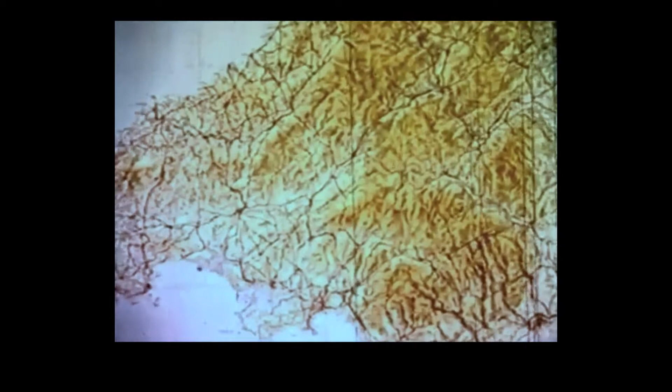Increasing industrial demand in the supply area of the West Glamorgan Water Board has created problems in times of drought. The board's consulting engineers have recommended that the Towy and its catchment area can solve these problems for many years to come. What is needed is a reservoir up in the mountains near the source of the river, where the rainfall is heaviest, 2,000 millimeters a year.

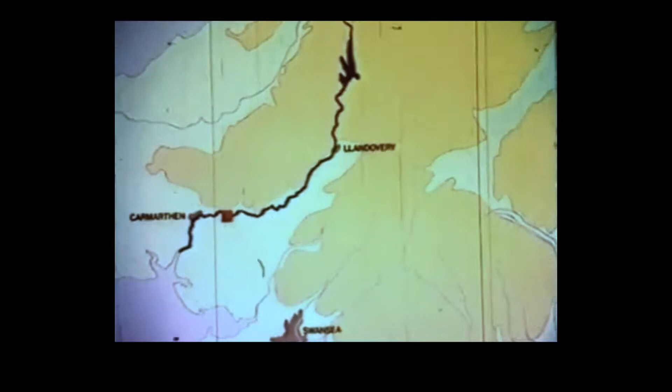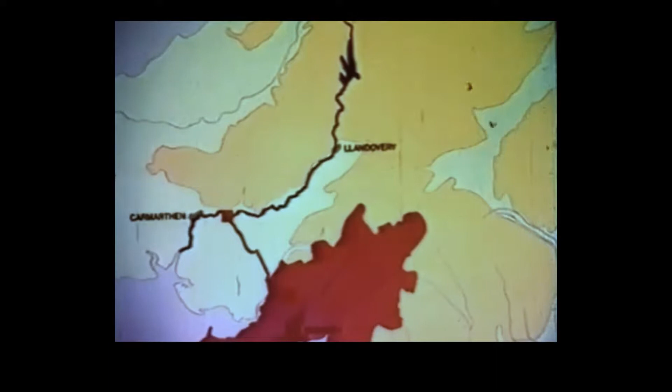The new lake will then regulate and augment the flow of the Towy. Water will be taken from the river 64 kilometers downstream and pumped to a new treatment plant and control centre near Swansea. From there, it can be distributed through the board's existing supply system. The biggest job in the scheme will be the construction of the dam at Llyn Brianne.

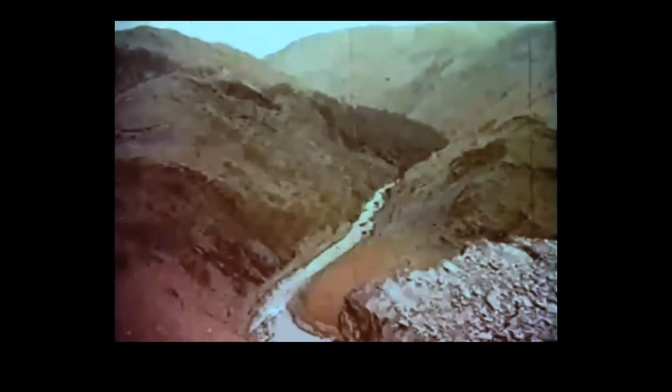The site is in a narrow gorge. The rock is exposed or near the surface. Studies by the consultants have shown that a rock-filled dam with a clay core will be less costly to build than one of concrete. 4.5 years have been allowed for its completion, but the contractors are aiming to impound the river after only 3.5 years.

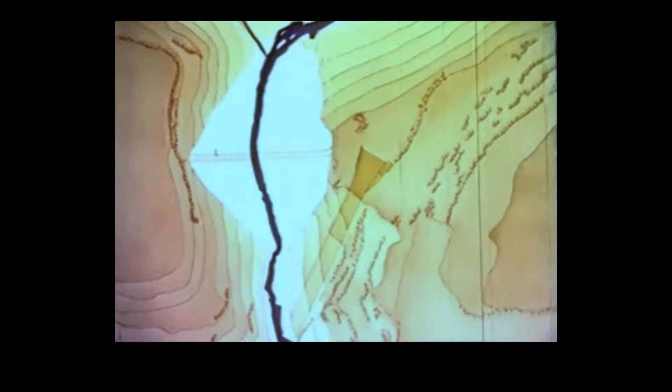Standing over 90 meters, Brianne Dam will be Britain's highest, and the length along its crest will be 300 meters. 5.5 million tons of material have to be placed in this gorge. While this is being done, the Towy will have to be diverted through a tunnel some 430 meters long. A coffer dam will be needed to divert the river into the tunnel and to keep the gorge dry.

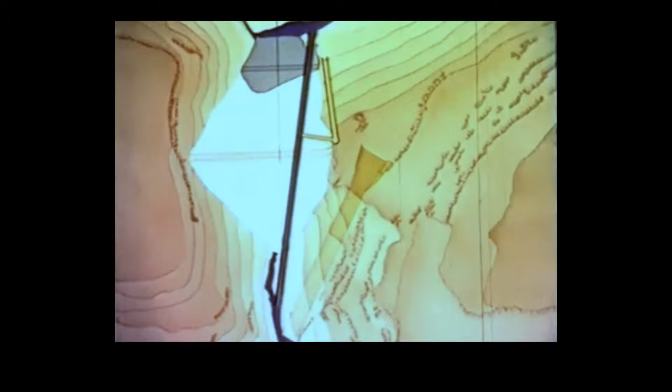Other underground works will be needed in the project, principally a draw-off tunnel and shaft to lead water from the reservoir to the permanent outlet works at the downstream end of the tunnel. There will be an overflow spillway, as well as new roads and bridges to the regulator house and across the dam crest. A quarry area at the spillway approach will provide the rock fill for the dam.

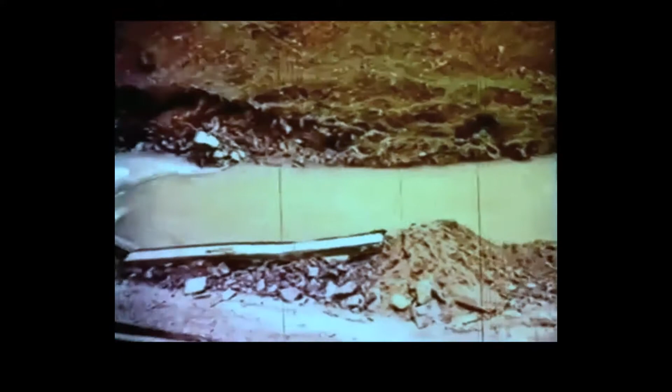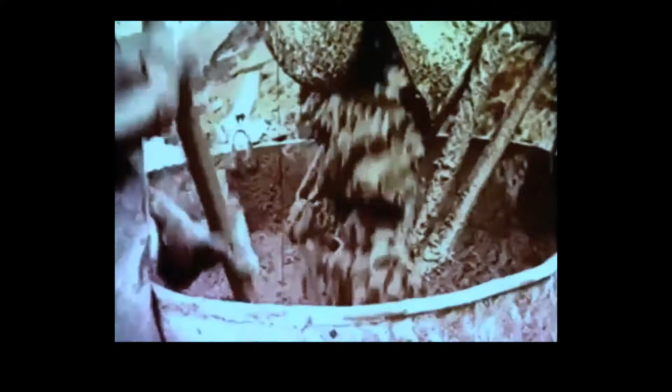First, the Towy must be diverted. The downstream end of the tunnel has to be extended in cut and cover to carry the river well clear of the toe of the dam. The tunnel is lined with concrete. All major tunnelling work must take place during the first year on the site, the year of preparation. And already, Llyn Brianne is living up to its reputation for high rainfall. The tunnel is ready to take the Towy.

Upstream, the material removed forms the first part of the coffer dam. And all the time, the river must be kept free of pollution and available to the users downstream.

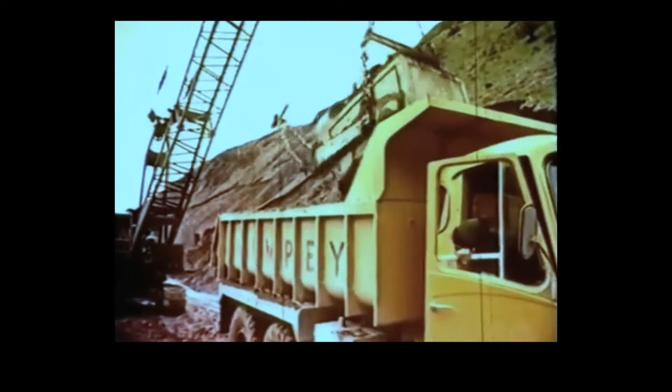Work has been going on for 12 months. Already 300,000 cubic meters of loose material have been removed from the river valley. But not until the riverbed is dry can the cleanup and grouting be finished. The next 2 years of the schedule will be the years of building the dam itself.

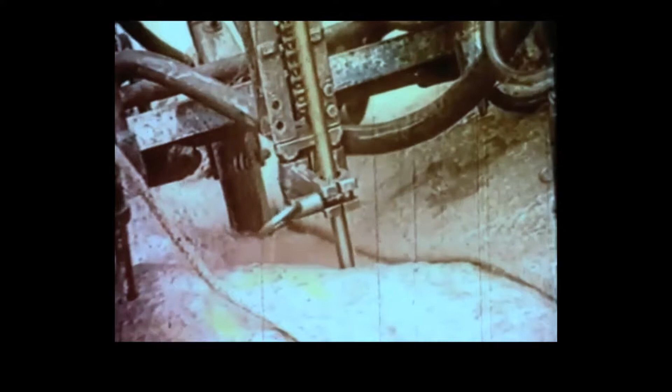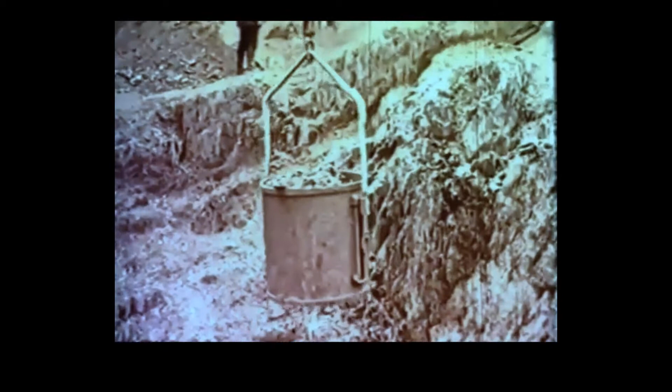The rock is largely a slaty mudstone. Foundation work has uncovered a channel cut by Ice Age water. This must be cleaned out and filled with concrete. On the steep valley sides, the abutments have to be cleared of loose rock, while the area which will be in contact with the clay core has to be excavated down to solid rock and then sprayed with concrete.

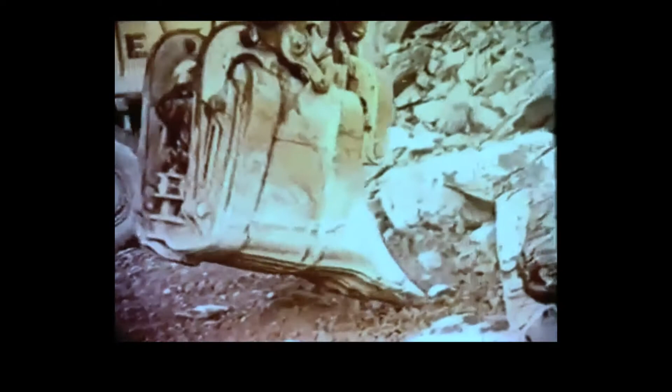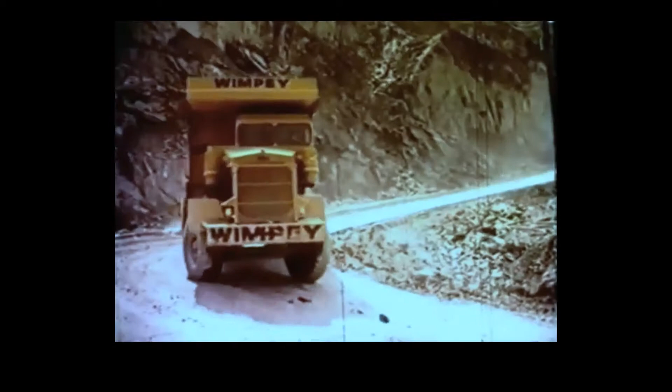Rock will form the bulk of the dam, 4.5 million tons of it. All to be won from the quarry area, up to 16 tons at a bite. The rock is hauled to the dam by a fleet of rear dump trucks, each with a 45-ton payload, running day and night over a system of temporary roads designed to serve each level of the dam as it rises above the valley floor.

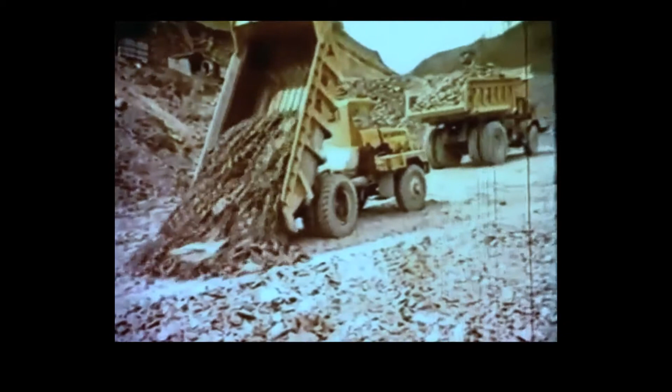Only 11 kilometers away, near Abergwesyn, is the source of clay for the dam. Its availability was a key factor in deciding the kind of dam which would be built. The clay will form the dam's impervious core. Once sheep drovers passed this way, taking their flocks to the markets of London. Now the roads are new, and so is the flock: 25 tipper trucks carrying a regular supply of clay for the dam builders.

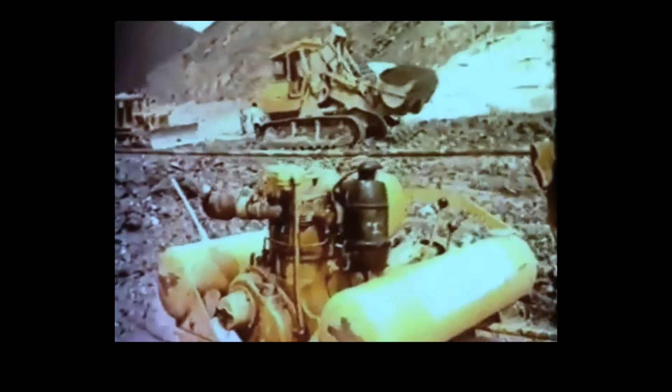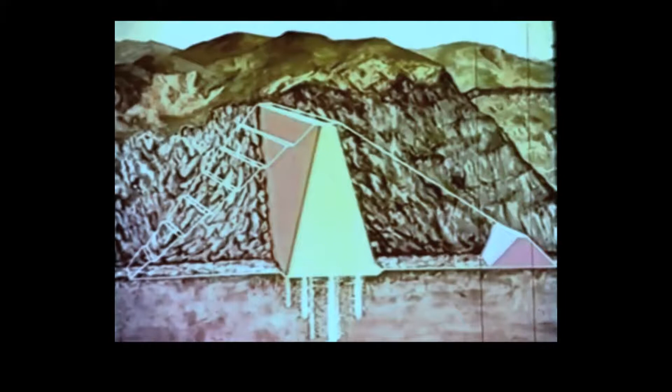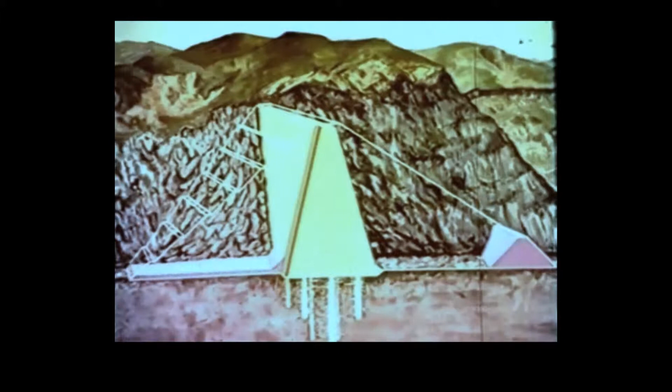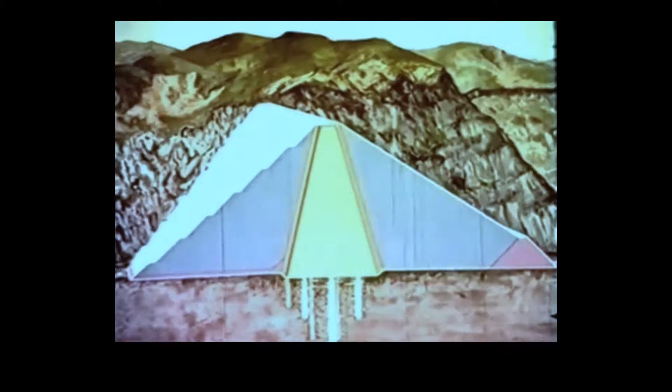It is protected from erosion downstream by a filter zone of fine material. Beyond this is transition material of clean rock, while there is a drain of larger rock in the old riverbed. To protect the upstream face of the core, there is another transition zone. The shoulders of the dam are rockfill. Downstream, a stepped slope gives an average gradient of 1 on 1.75, while upstream, the slope is 1 on 2.

Much of the graded transition material is produced by a crusher on the site from rock dug selectively in the quarry. The fine filter material is obtained from an old lead mine at nearby Llandovery, a new use for an old waste product.

One of the most difficult jobs. To make room for the spillway, half a mountain must be cut away, over 1 million tons of rock.

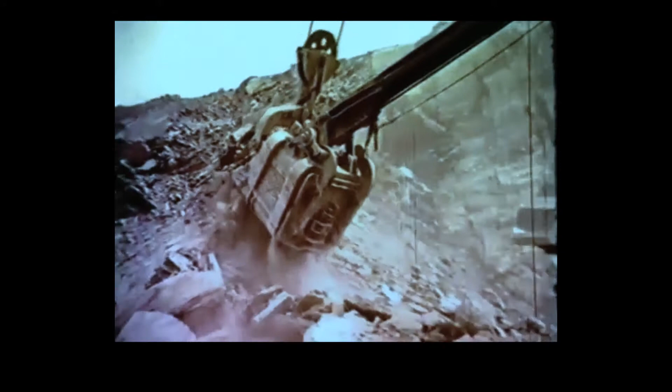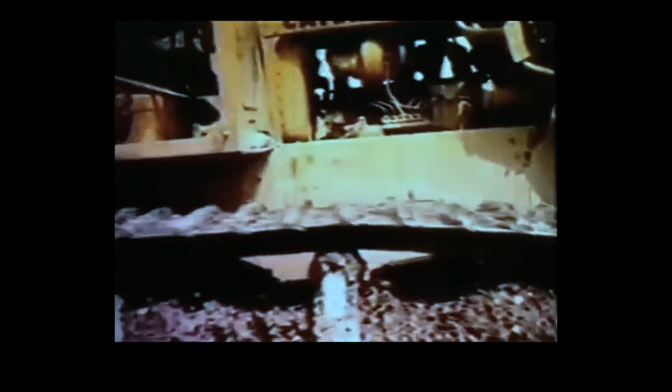The clay core is compacted in 0.3 meter layers by 4 passes of a vibrating roller. At the abutments, particular care must be taken, and here smaller manual equipment is used. And all the time tests are carried out. This one confirms the compacted density of the clay core.

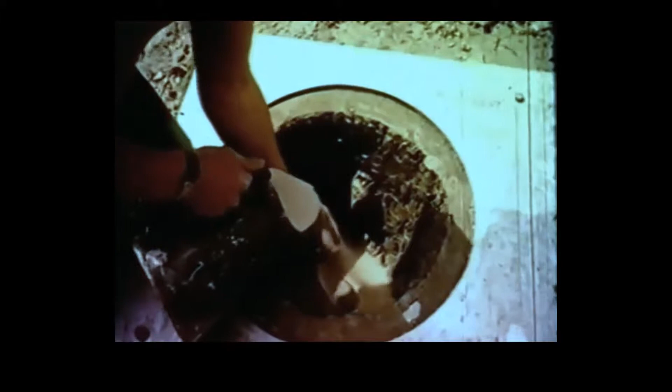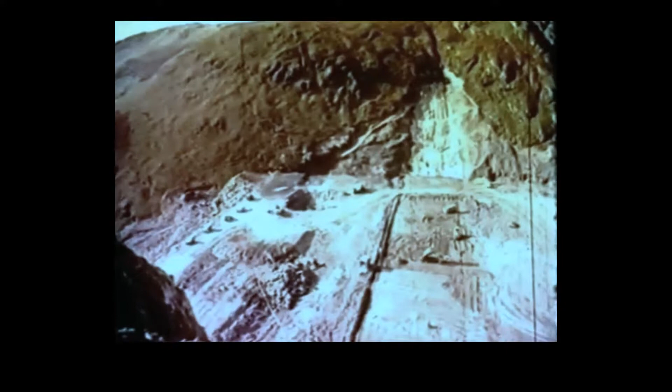Late autumn in the second year of the project, but the first year for placing rock and clay. Progress is good. The chances of impounding at the end of the third year get better and better. And that means the people of West Glamorgan will get their much-needed new water supply a whole 12 months earlier than originally expected.

Still more tests, this time by the Building Research Station, keeping an eye open for any movement which might occur in the structure. 2, 5, 8, 7... Excavation has now moved to the top of the spillway, cutting the approach channel and providing more and more rock for the dam.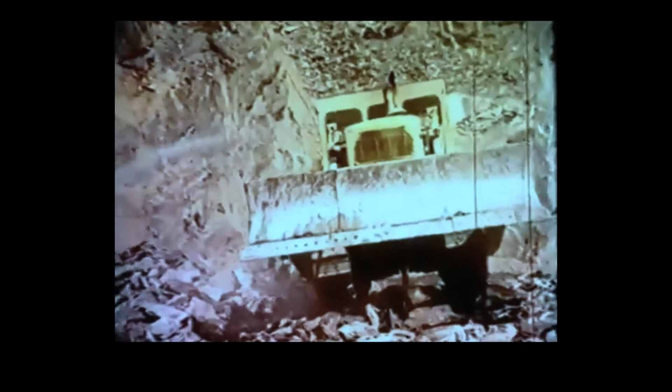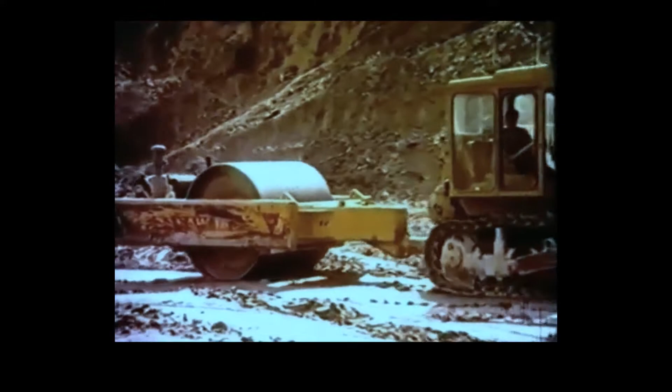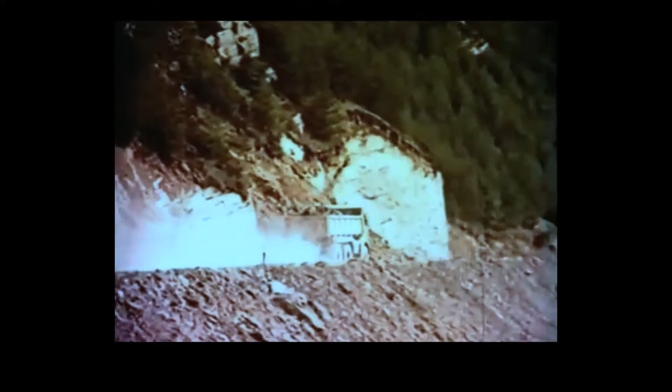Fill is spread in layers 0.45 meters thick. After 2 layers have been spread, they are compacted. And all the time, the various zones of the dam must keep pace with each other as they rise above the valley floor. In carrying rock and clay to the site, the trucks are traveling huge distances. By the end of construction, they will have covered 2 million kilometers.

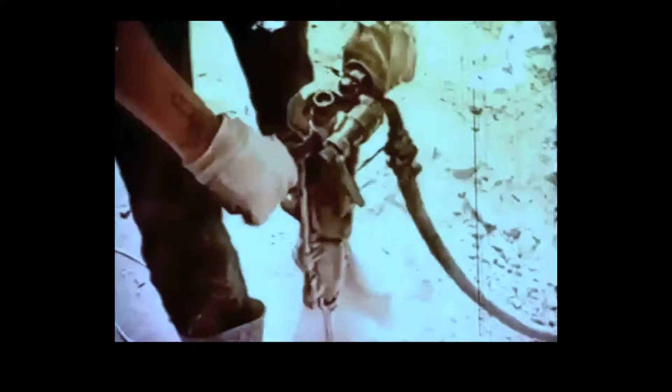Spring of the third year, and concreting starts on the spillway. The slope is 1 on 1.8 at its steepest. For the men who will work on the spillway, the months of building will make huge demands on their stamina. The water which will flow down the spillway will reach a velocity of up to 27 meters a second. This energy must be dispersed by a break of slope at the bottom, the spillway bucket.

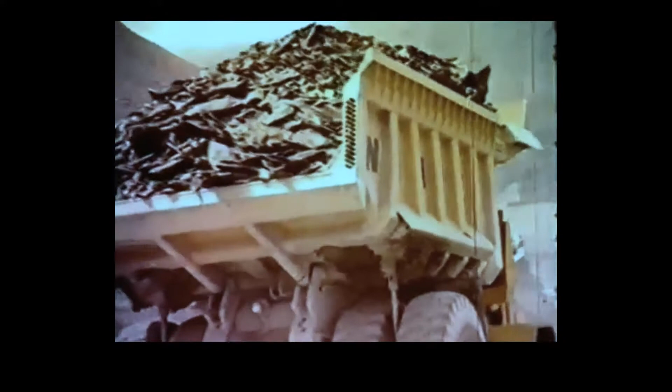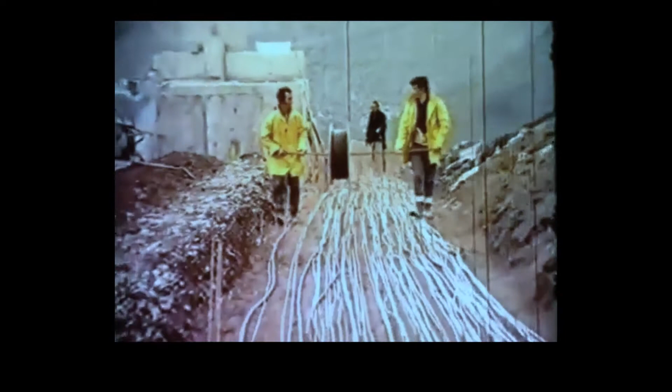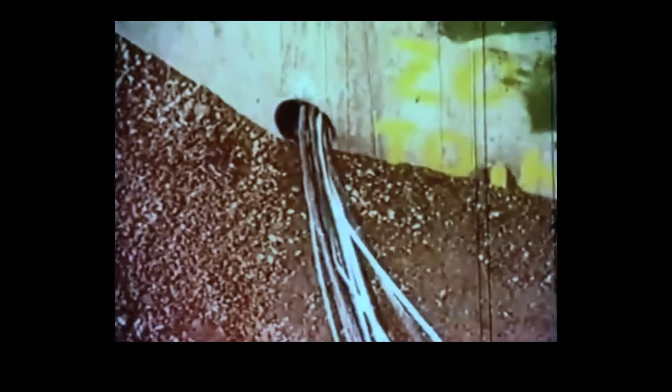Stresses within the dam are monitored by settlement gauges and groups of piezometers set at 3 different levels. The settlement gauges are connected by plastic tubes to observation stations on the downstream face. The tubes from the piezometers run in precast channels down to the gauge house near the tunnel outlet. Here, the pore water pressure can be measured. High pressure is the danger. It can cause instability in the structure.

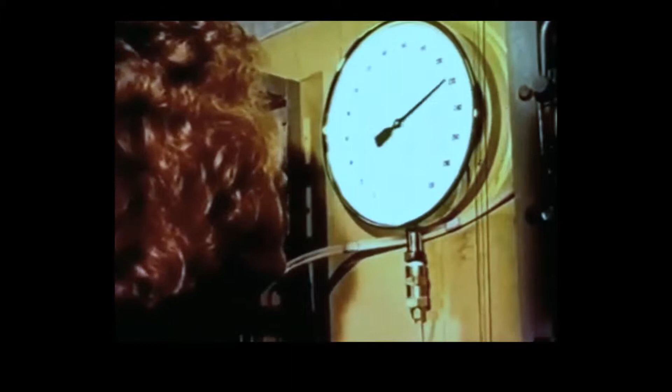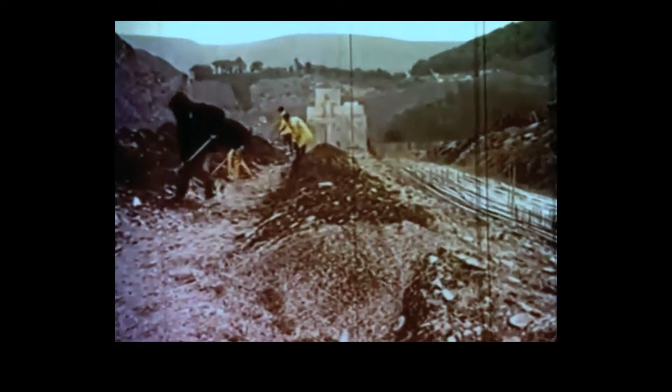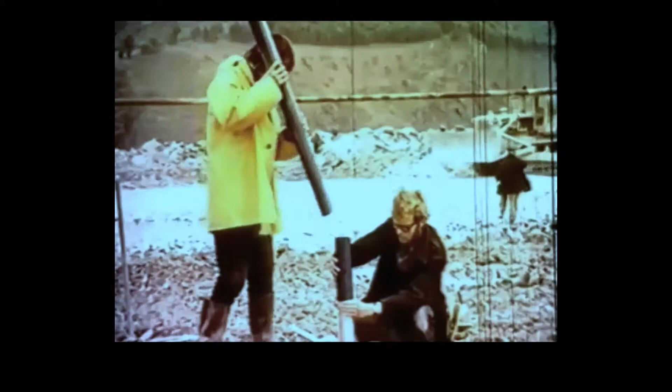This tube contains a pneumatically powered induction instrument to detect any vertical movement within the dam. Horizontal movement, too, is measured by inclinometers, let down into the dam inside metal tubes. The tubes are built up vertically through the clay core from the riverbed to the summit. This is done along the center line of the dam at 3 places.

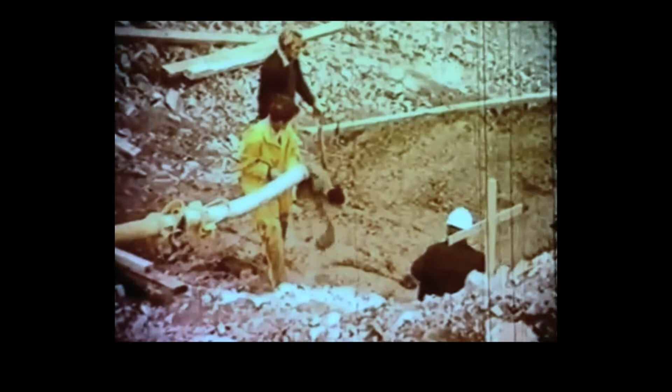This batching plant provides concrete for the spillway. The mix has had to be specially designed for the job and needs an aggregate whose nearest source is 100 kilometers away. The need for the special mix is because of the steepness of the hillside. The concrete has to be pumped over a length of 350 meters, with a maximum fall of 100 meters below the batching plant. This is the longest vertical distance concrete has ever been pumped in Britain, and there are over 20,000 cubic meters to be placed.

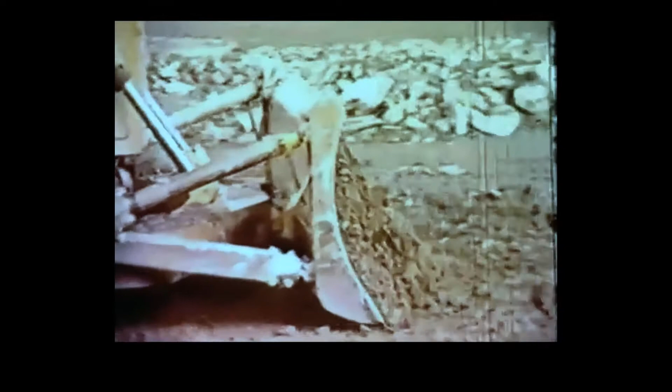The end of the third summer, the second of placing rock and clay. The dam is nearing its summit, becoming a more difficult and congested work area as the crest narrows. Only a few more meters to reach the top. Good progress on the spillway. The crest has been excavated, though it will be the last part to be concreted.

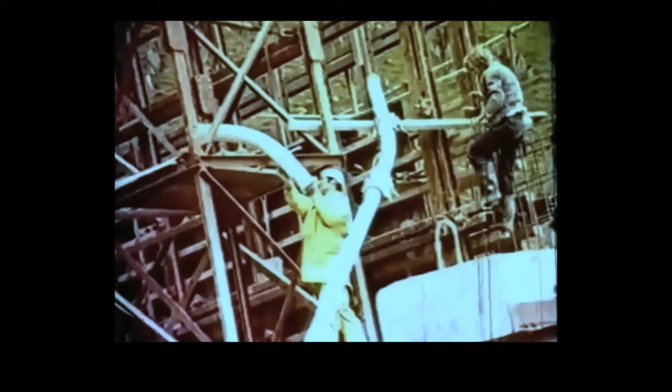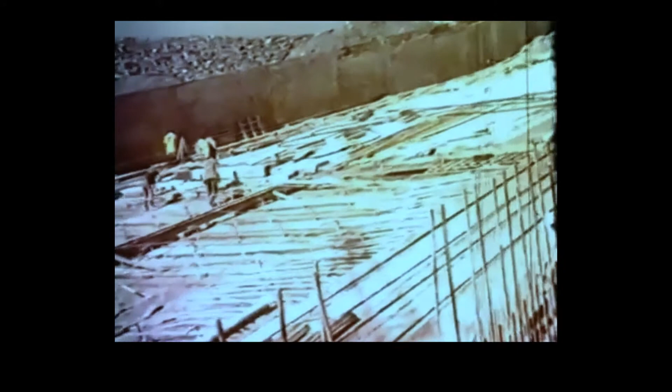Further down, the concreting is well advanced. The high-quality finish will be produced by drag screeds, which, like the travelling wall shutters, have to be secured on cables attached to winches on the crest. Sometimes the men on the spillway wish they were on winches too. And the rain doesn't help.

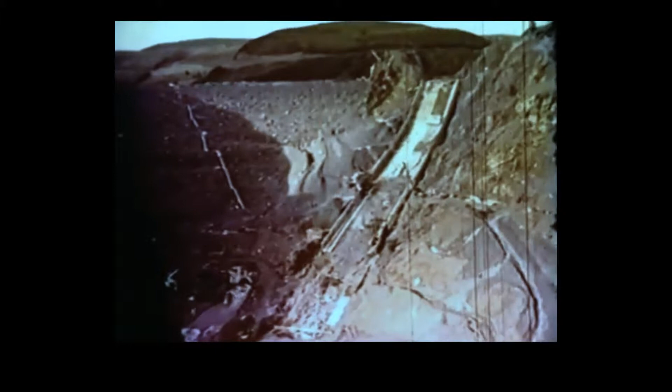Winter means special concreting techniques to get the spillway ready in time. But the job is nearly completed. Concreting has moved right to the foot of the slope, to the spillway bucket. The main structure of the dam at Llyn Brianne is finished. Impounding can start.

This is the upstream face of the dam. The draw-off tunnel and gate shaft are ready, but the river still flows through the main tunnel below. Before this tunnel is sealed, an emergency gate must be lowered into the draw-off shaft, and so prevent the rising waters of the reservoir entering it.

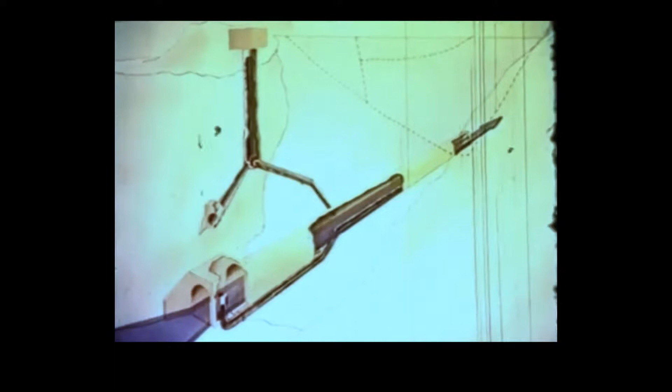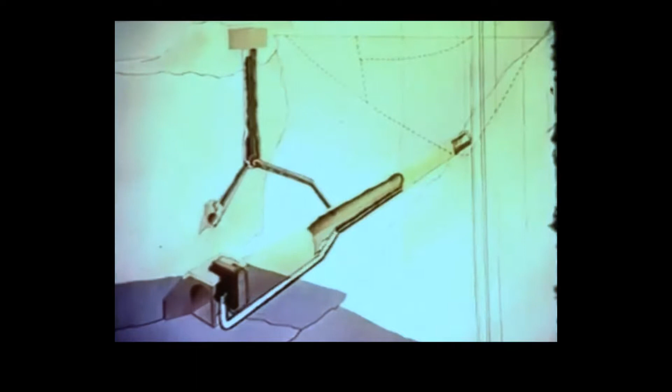Now the stop-log gate can be placed at the entrance to the diversion tunnel, and the tunnel itself sealed. It will then be dry, and work on the outlet can be completed. But as the man-made lake fills, a guaranteed flow of water must still be maintained through a permanent scour pipe. While the reservoir fills, the tunnel will be permanently plugged with concrete.

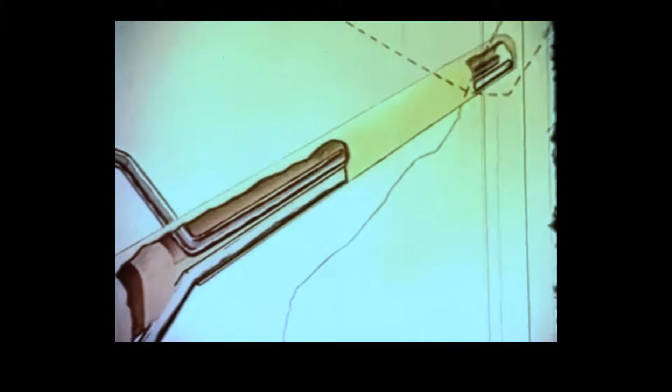At the downstream end, the delivery pipes from the draw-off tunnel and shaft can be installed. The regulator house and valve systems will also be finished. The water will continue to rise during the summer, and less than a year after impounding, water will be able to flow over the spillway crest and safely downstream.

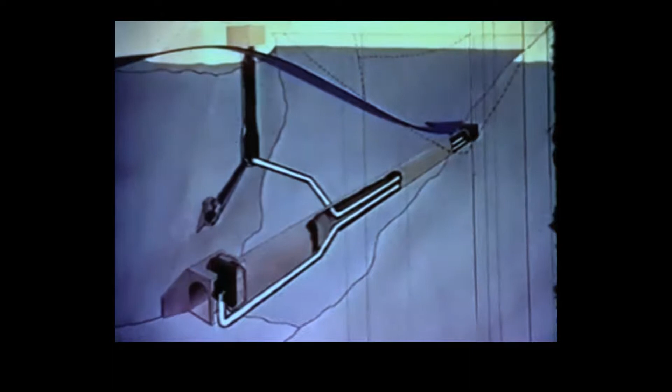Then, when all the tunnel works are completed, the emergency gate can be lifted. It will be left raised but ready to be used if needed at any time. Three permanent discharges will be available: through the scour pipe, through the draw-off tunnel, shaft and draw-off system, and in times of flood, over the spillway.

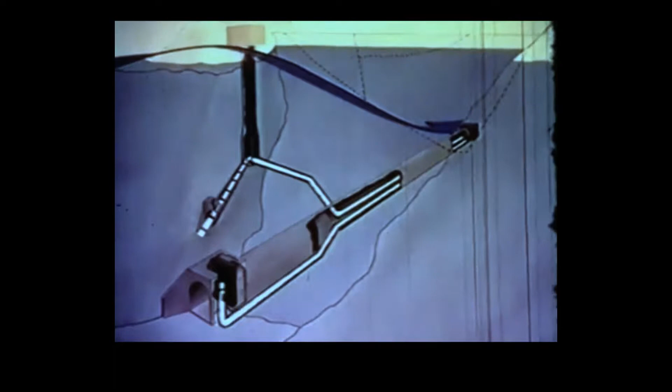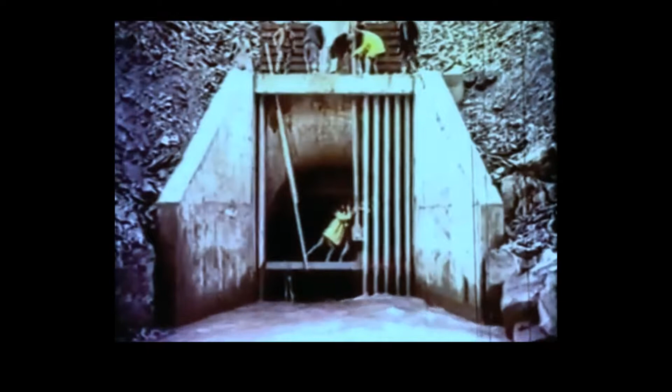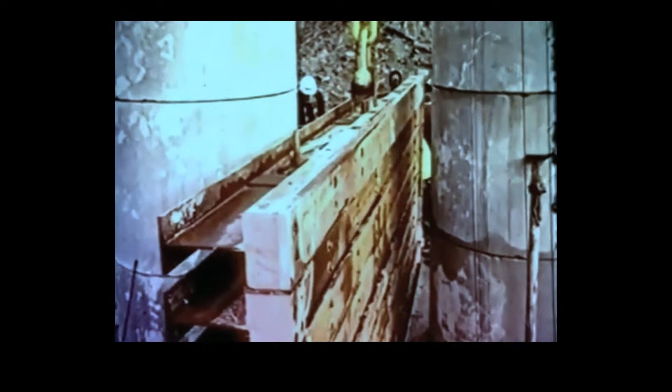The third year of the project ends. Now come the months of finishing and of impounding. Upstream, bulldozers reduce the river flow while impounding operations go ahead. The precast units of the concrete trash racks are placed. A steel screen is fixed at the entrance to the draw-off tunnel. The stop-log gate is lowered on its supporting towers, sealing the tunnel entrance.

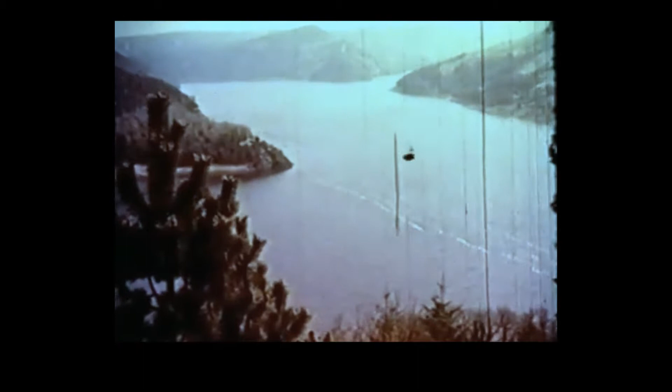The people who have helped to build it can relax in a chat with Her Royal Highness Princess Alexandra, bask in the Welsh sunshine and the knowledge of a job well done.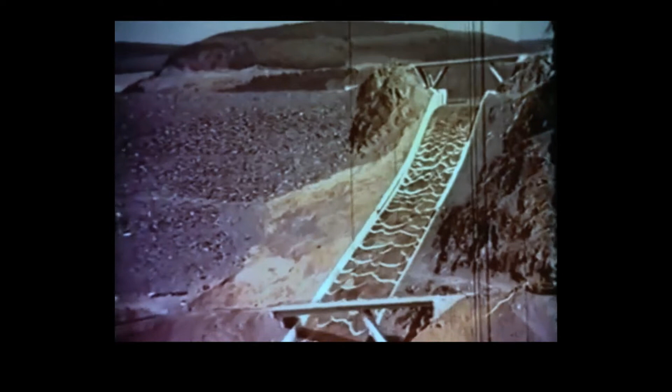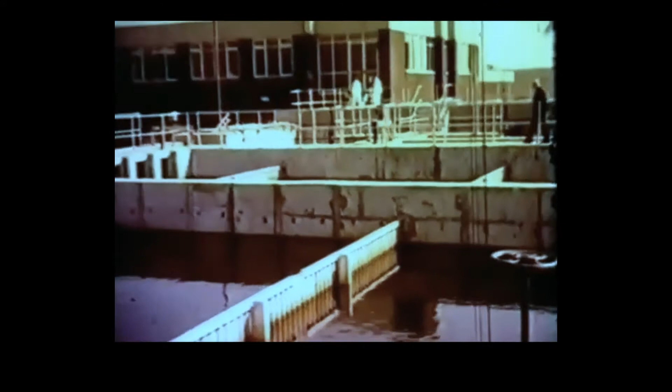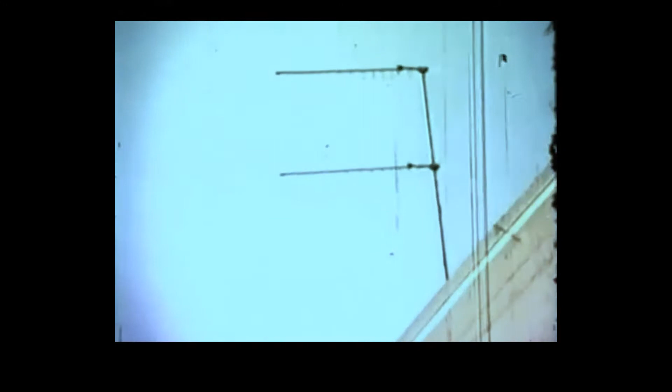Water flows down the Towy Valley at a controlled rate. 400,000 people in the Swansea area are now benefiting. Almost 400,000 cubic meters a day are available. All this has been achieved a whole year ahead of schedule, thanks to the speed with which the Llyn Brianne Dam was built, and the river's environment is unscarred.

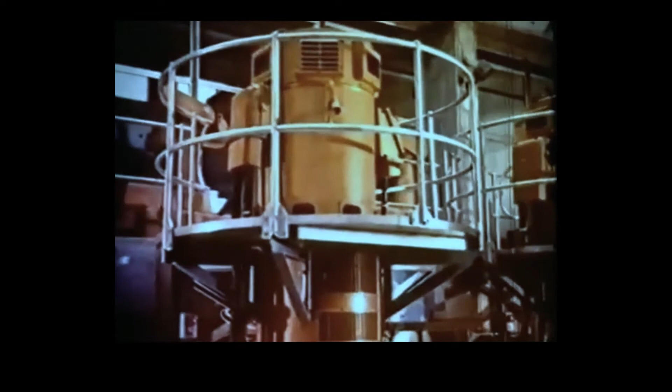Nantgaredig pumping station, 64 kilometers downstream from Llyn Brianne. Here water is pumped from the Towy into settling tanks. Water for people. Water for commerce and industry. Water for Wales.